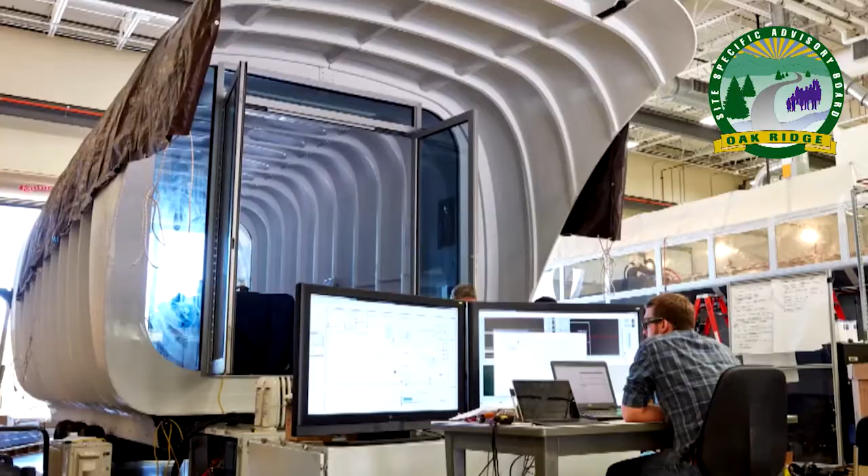The U.S. Department of Energy's Oak Ridge Reservation is the site of a vital national defense facility and a modern computational and scientific center. But over the years, parts of the reservation have been contaminated with radioactive and other hazardous waste. DOE has been busy cleaning up those affected areas, but much remains to be done.

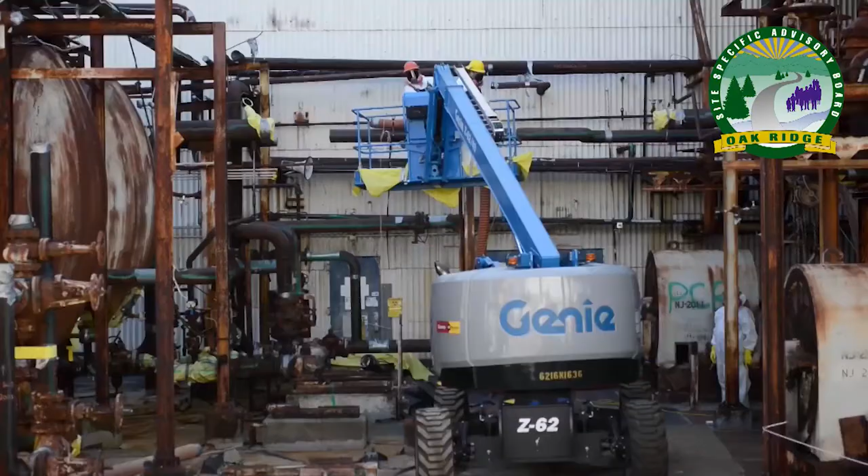Citizen input is a valuable part of that effort, and DOE welcomes advice from the Oak Ridge Site-Specific Advisory Board, a citizens panel that provides independent advice and recommendations on DOE's cleanup of the Oak Ridge Reservation. The board provides input on a wide range of environmental cleanup operations underway at Oak Ridge National Laboratory, Y-12 National Security Complex, and the East Tennessee Technology Park.

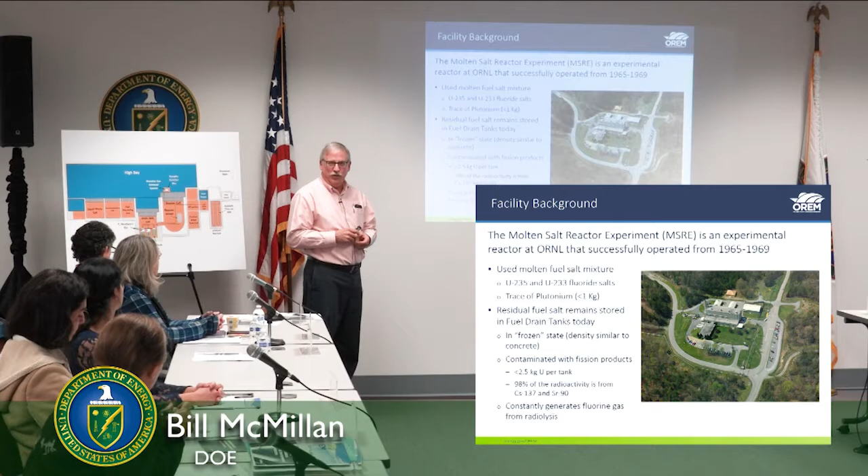Okay. So the Molten Salt Reactor Experiment was a facility built at ORNL, and it operated in the late 60s. Its purpose was to test different types of reactor fuels in a molten salt breeder reactor operation. And I'm not a reactor guy, so don't challenge me on what that really means, but that's what its purpose was.

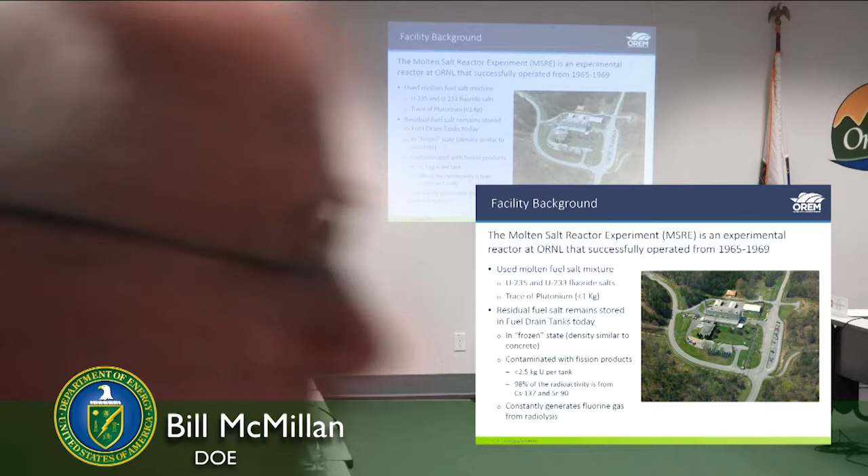And they tested uranium-235 and uranium-233 as the primary isotopes in those 4 years of operation. Towards the end of that, they actually also tested a little bit of plutonium in the facility to see how that would react in the reactor operation.

The fuel mixtures utilized a fluoride salt, primarily uranium tetrafluoride, in a carrier salt of lithium fluoride and beryllium fluoride, I believe, or barium fluoride. Some fluoride salts were the carrier that remained molten and circulated through the reactor system. That salt today remains at the facility.

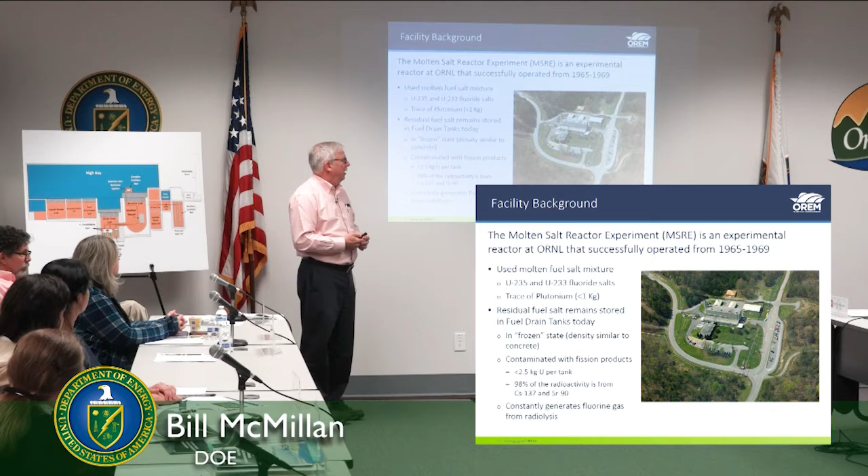Once the reactor operation ceased, the reactor core and the recirculation system within it were all drained into drain tanks. I've got some photos of that in a few minutes. And then after all the system was drained, it was actually flushed with a flush salt to wash any uranium residues from that system as best it could be done.

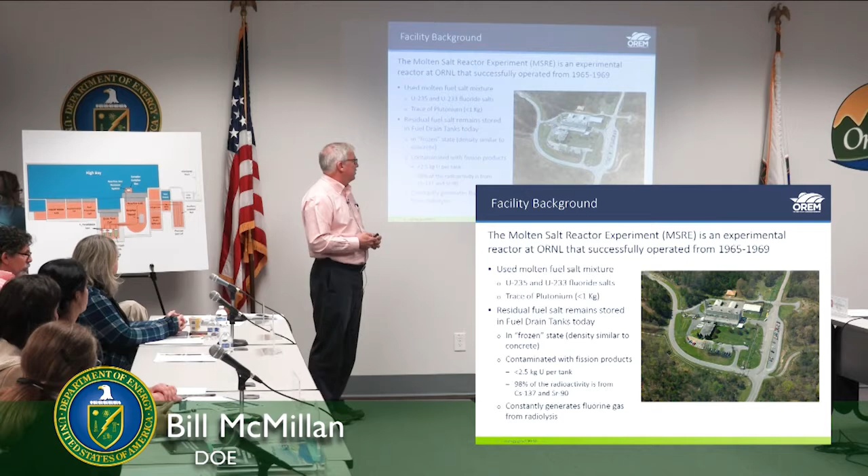Today, the salt in the tanks is in a frozen state. In other words, it cooled and solidified. It's in a frozen state, and its density is similar to that of concrete. It's a rock hard salt mixture, contaminated with fission products.

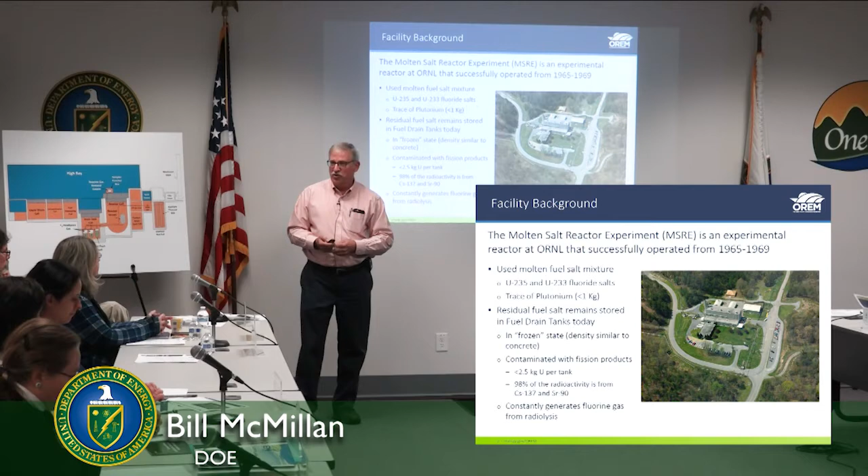Now in the late 2000s, the reactor salts were defueled, so the uranium has been removed. There's still that trace of plutonium in it, but about 2.5 kilograms of uranium per tank is worst case. They actually measured the tank that had the first material, which is believed to have the highest concentration of uranium in it.

After defueling, there's about 2.5 kilograms in that tank, and assuming the other tanks are less contaminated than that, which is pretty well certain based on the analysis. So less than 2.5 kilograms per tank, and there's 3 tanks.

The radioactivity is gamma radiation coming from the byproducts cesium and strontium-90. About 98% of the radioactivity is from those relatively short-lived radionuclides, strontium and cesium.

But the hazardous material constantly generates a little fluorine gas from the leftover fluoride salts due to the radiolysis of those salts. So that represents the biggest hazard we deal with today. It's not the radioactivity or the radionuclide content, it's those fluorine gases that come from the salts.

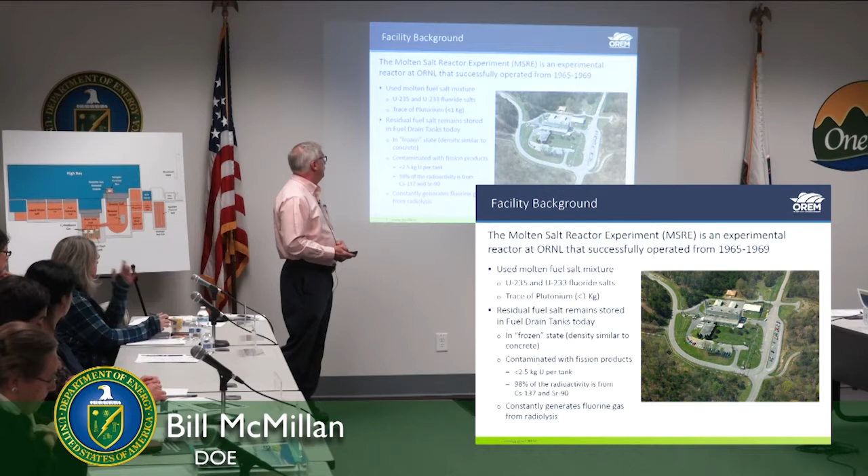Location: MSRE is located, if you're familiar with the lab, on Melton Valley Drive, which is kind of on the backside of, what's the ridge? Melton Ridge? Pine Ridge, behind ORNL proper. So it's on the back road.

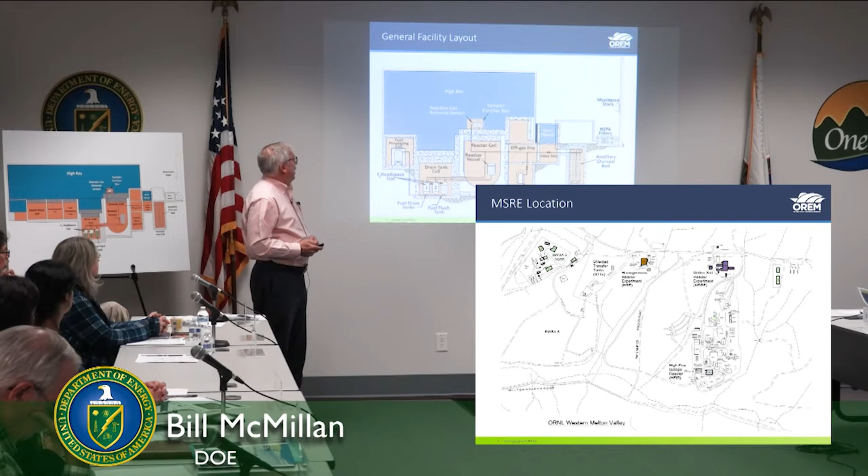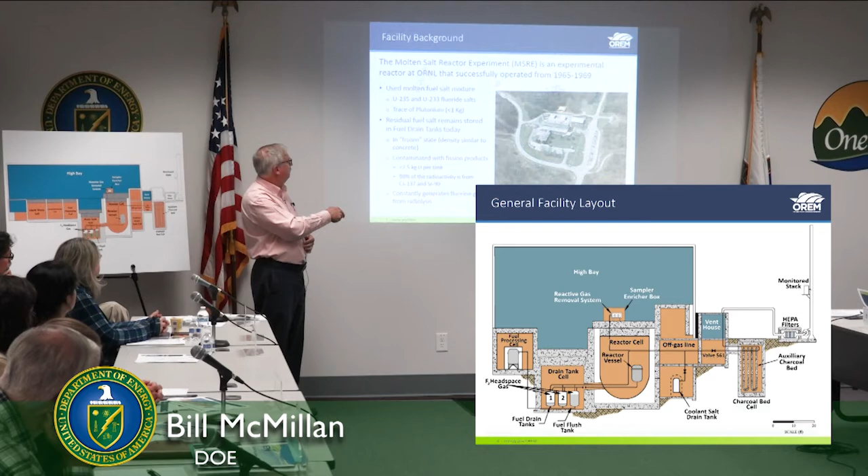This is the same as what we have over here. Basically, this is a profile of the facility, ground level being right in this area right here. So the reactor cell was in the center in an underground vault. It's got the shield plugs on top of it. The drain tank is adjacent to it at a little lower level, obviously to let the material drain into it.

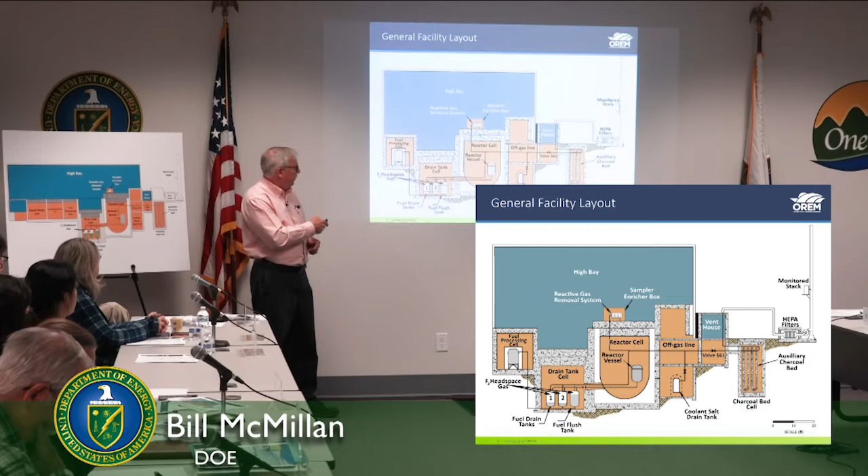And then you had various accessory facilities. Basically, the coolant recirculation system was on this side. Some of the off-gas filtering systems over here with the charcoal bed, and then HEPA filters, and the exhaust goes up the stack. Currently, you see this reactive gas removal system, which was actually added in the mid 2000s, and most of these other facilities are all drained and decommissioned as well. So I'll refer back to this. That's why I've got the chart on the right.

Some of the history and notable activities after the reactor was shut down. I mentioned all the salt was drained into the drain tanks, and the reactor loop was flushed with a flush salt, which was also drained into the flush tank. In 1994, though, well after the shutdown, it was realized that a lot of the uranium was starting to collect in the off-gas system, in the charcoal bed.

So we had significant concentrations of fluorine and UF6 gases that led to the contamination in the auxiliary charcoal bed, which is this system over here. I think I've got a picture of this too, but they're really standpipes that the air circulated through.

And so there was a cleanup action to clean up those charcoal beds to remove the contamination. That uranium was removed from the charcoal bed in the 1995 to 2000 timeframe, and that's when the reactive gas removal system was installed. You'll hear me talk a little bit about RGRS as we go through. That's the system that treats the gases to remove the fluorine and any residual uranium from the gases in the off-gas system.

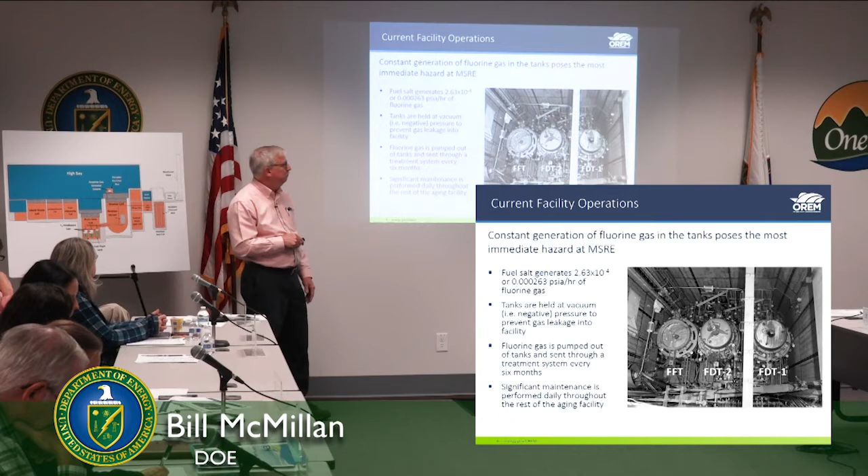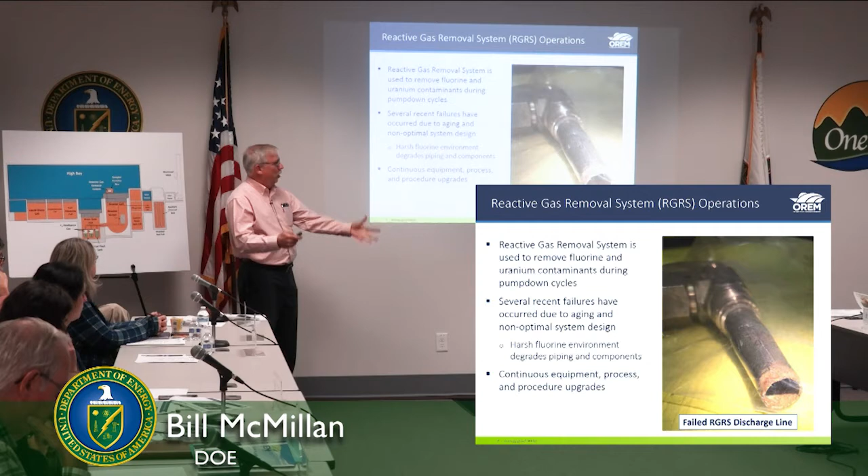So a couple of years ago, with all the issues with maintaining the MSRE, we started looking and thinking about what do we need to do to make the operation a little more efficient. So we had an engineering evaluation done, brought in a team of experts from outside of our organization that could take a good hard look at the systems and make some recommendations. So two key recommendations I'll talk about tonight, because we're actually implementing measures to take care of these two recommendations. One is to install a continuous ventilation system to replace the RGRS system. As I mentioned, the fluorine gas is kind of the big heavy hitter, and the generation rate is very, very low. So why are we letting it accumulate to a point where it's hazardous and difficult to handle, and doing an active operation to pump it down? So the team recommended going to a continuous ventilation system, and that's something I'll talk about here in a couple of slides.

That would eliminate the large concentrations of fluorine gas that you currently get, and eliminate a lot of risk from the corroded components of the system.

Looking at the electrical systems, we're doing some things to improve the aging electrical systems. A couple of years ago, we had flooding in the basement from groundwater seepage. The sump pumps down there failed, and when we went to shut the power off, we found leads coming into the building that we didn't know where they were coming from. That helped us realize the uncertainty we have with the power feeds into the facility.

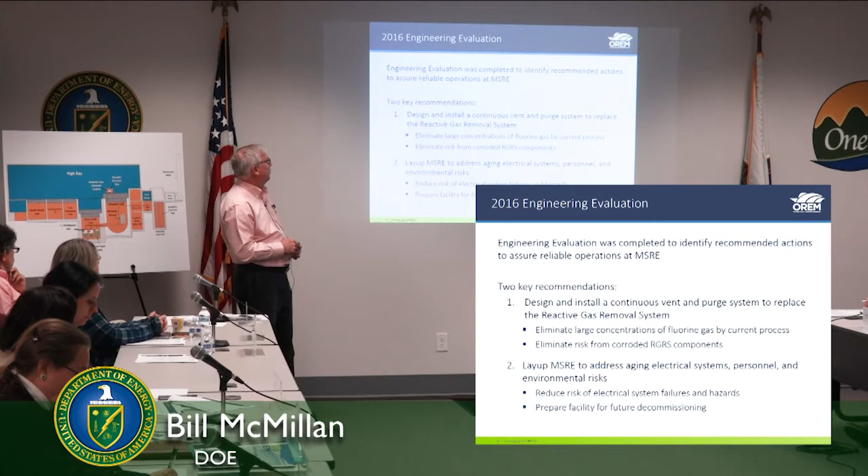That engineering evaluation was completed, and we've taken it to heart, looking for things we can do. So the 3 things I'll talk about based on the engineering evaluation: the continuous purge system, the layup, which is what we call the electrical upgrades, which also involves heating, ventilation, air conditioning, and some office refurbishment, and the in-situ decommissioning, an idea we came up with a couple of years ago. I think in one of the briefings Jay Mullis gave, he talked about that as an opportunity we're looking into, so I'm going to bring you up to speed on where we are with that process as well.

Talking about continuous purge, it's currently in the design phase, and we're getting close to starting the work in the field. Basically, it will replace the current RGRS system, streamline the removal of the gases, minimize any failure points, and reduce potential areas of exposure to workers through passive system maintenance.

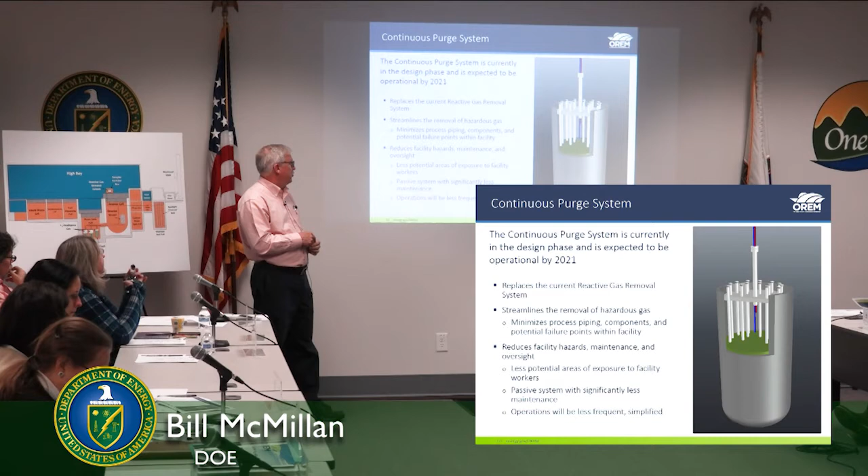So it's basically a passive system that will be continuously operational. We won't need to go into a big activity every 6 months to do an active pump down.

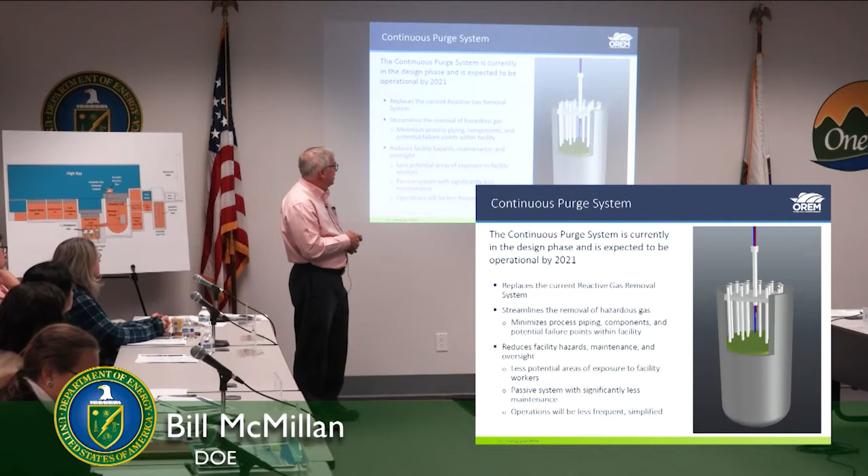If you take a look at the schematic here, this is basically a schematic of the fuel drain, one of the fuel drain tanks. The risers in the middle are where the old thermal probes used to be located when they tried to heat the system. But the important part is looking at the red and blue lines up there. Our intent, and I think the next slide will talk to it a little more, is to input into those tanks a constant flow of nitrogen.

I know this is a big eye chart, but what I was just showing you was one of these tanks. The blue line is the feed of nitrogen into the tank, and the red line coming out is the off-gassing, where the nitrogen forces all the fluorine and headspace gases out with it.

I know you can't see where that's running, but it runs up out of the tank through the nitrogen cylinders that would be used to input the nitrogen. The red line goes out through a monitoring system that would tell us remotely that the system is operational, and we would monitor it remotely to confirm. It also has sampling capabilities in case we want to do periodic sampling of that off-gas to confirm the low concentrations we expect. Then it goes through that and straight on out the stack.

Some of the advantages: it'll allow for continuously ventilating the gas. The concentrations of fluorine are many orders of magnitude less than any regulatory requirements, so we won't need chemical trap treatment of it. It's hands-off operation, and we'll replace the current discharge lines with lines compatible with the small concentrations of fluorine that would be present. We'll use stainless steel throughout the system.

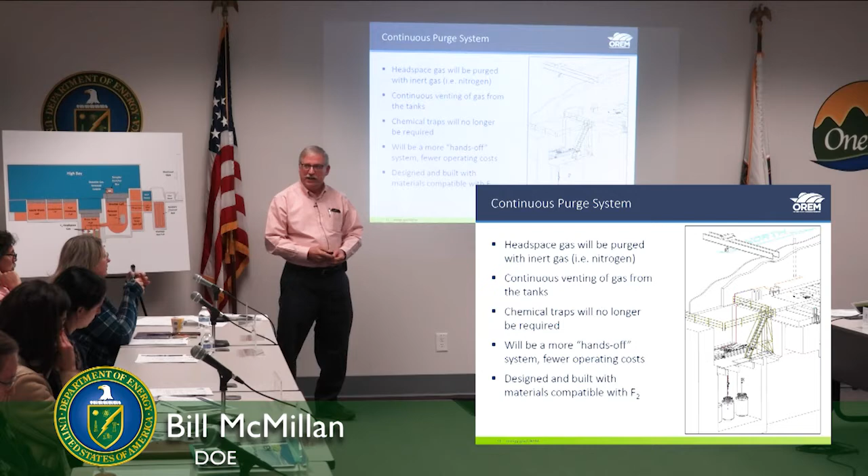So that's the continuous ventilation.

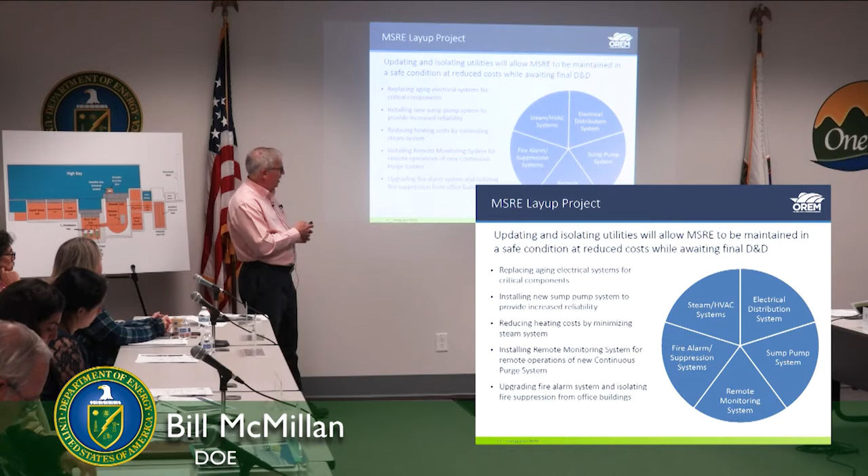Talking about the layup project, this is a brief description of some of the things we're addressing: the electrical distribution upgrade to replace the aging electrical systems, and new sump pumps in the basement. I mentioned the failures of those sump pumps a couple of years ago — they were really outdated pumps. We had them repaired and put back in, but we know there are better pumps these days, so we'll replace the sump pump system in the basement to provide the increased reliability we're looking for.

Minimizing the steam system. Currently, we buy steam from ORNL, and it's the same steam header that feeds the HFIR facility, which is a high mission priority for science. So in the wintertime when there might be a shortage of steam supplied for heat, guess who's the first one that doesn't get served steam? So we'll be upgrading the steam system to put its own boilers in place and provide the steam for heat, keeping the building heated so that the fire distribution system doesn't freeze, for example, and maintaining the people comfort that will be there in the offices.

New fire alarm system and suppression systems. All this stuff is outdated, and it's really just bringing it all up to standards of today. Remote monitoring system, I mentioned, we'll monitor all the equipment, the blowers, the ventilation system, the fire protection system, all that will be able to be remotely monitored without having people there to actually go inspect everything every day.

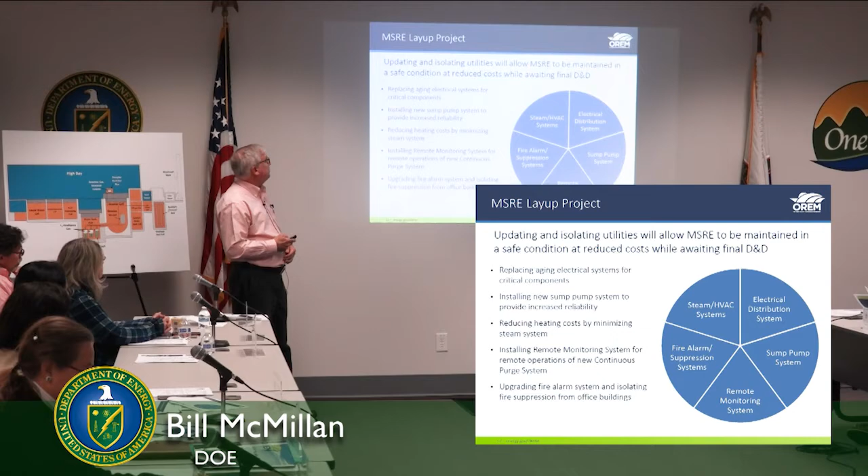Now switching to the ISD initiative, the in-situ decommissioning. Think of in-situ decommissioning, a lot of the synonym is entombment. We started looking at this a couple of years ago, but back when the CERCLA decision documents were developed in the late 1990s, we had basically two decision documents. This 1996 action memorandum was done to address the contamination, the migration of the uranium into the charcoal beds,

and it was what was put together to initiate the action to clean out those, to clean out the charcoal beds. 1998 was a record of decision for the D&D activity. At the time that was developed, even though entombment was a recognized decommissioning option by the NRC in the late 70s, we didn't really have much experience with it at that point in time. So the in situ decommissioning options, although mentioned in the ROD, were not really addressed and analyzed like they would be today.

So recognizing that, we decided we would at least see if that's worth analyzing today. And so a couple of years ago, we put together an initiative to, at least from a conceptual standpoint, do a feasibility as to whether it's something for us to go tackle and analyze in more detail. So we initiated a study.

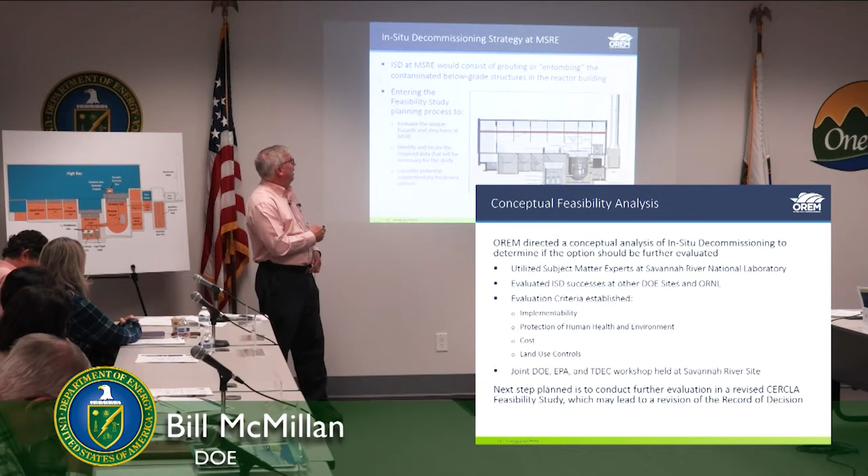So here's what it would look like if we were to do in situ decommissioning. It would consist of grouting and how much grouting it would be. Basically, the options would range from everything below grade, or it could be just the tank, just the reactors, tank and reactor, any combination of those below grade structures we would look at doing in situ decommissioning on.

Of course, the superstructure over it and all the support systems would still come down as planned. We wouldn't be doing like Savannah River's done with the reactors there, where the whole thing is just a big monolith sitting up out on the landscape. Primarily it would be below grade in situ decommissioning with a slab over the top of it when it would be done.

We're entering the planning process for that right now, where we're looking at what gaps we need to understand from a data standpoint, where do we need to go collect information about the facility, do we need to sample the salts in the tanks to get real-time data for that salt and content in it, how much NDA do we need to do, what kind of piping do we need to remove or not, and things like that.

So we're looking at where those data gaps are that we need to go fill, and the planning process will also conclude with establishing data quality objectives for any sampling results that we'll use, and actually I think it goes all the way through preparing a sampling analysis plan. That plan and doing the sampling, doing the actual work of the feasibility study is the next phase. This is phase 1 to get the planning done. Phase 2 would be where we actually go out and gather the data and start analyzing things and performing the models of the groundwater and things like that we would need to do.

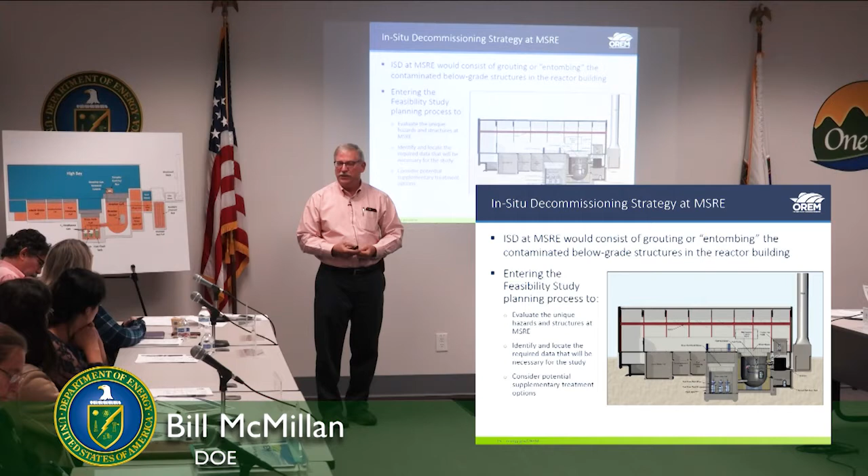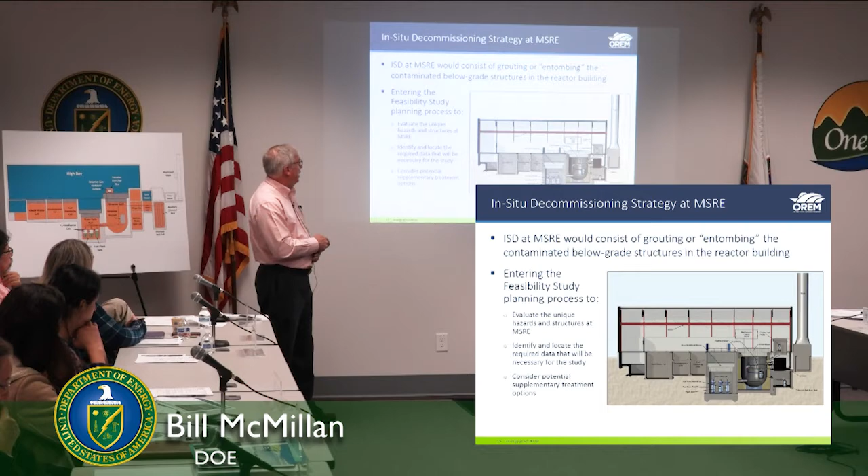I mentioned identify and locate the data. Consider any potential supplementary treatment options. Obviously, as long as there's the high dose fields from the strontium and cesium for the next 300 years or so, there's still a fluorine gas generation that's going on, although it should be going down as the radiolysis, as the decay of the strontium and cesium occurs over a couple of hundred years. Whether supplementary treatment options, getter materials, or passive treatment of those off gases is necessary to incorporate into the plan. So the planning process is looking at all that.

The update of the feasibility study would provide the thorough investigation to address those options, which options, how much of the facility would be grouted or not. We would do modeling to evaluate the long-term impacts, similar to what's done in a performance assessment if you were a disposal facility. Looking out, models run, I think, for 1,000 years to understand as the system sits there, what is the release capability of it. Use of a getter material to capture fluorine if necessary.

What types of grout materials would be used. Some of the things that Savannah River's developed are self-healing grouts, that if they crack, they basically heal themselves. 1,500-year lifespan grouts, water repellent grouts, those kinds of things would all be considered as what would be the best type of grout to use for this situation. And then what kind of monitoring systems and long-term stewardship actions would we need to incorporate into our plan.

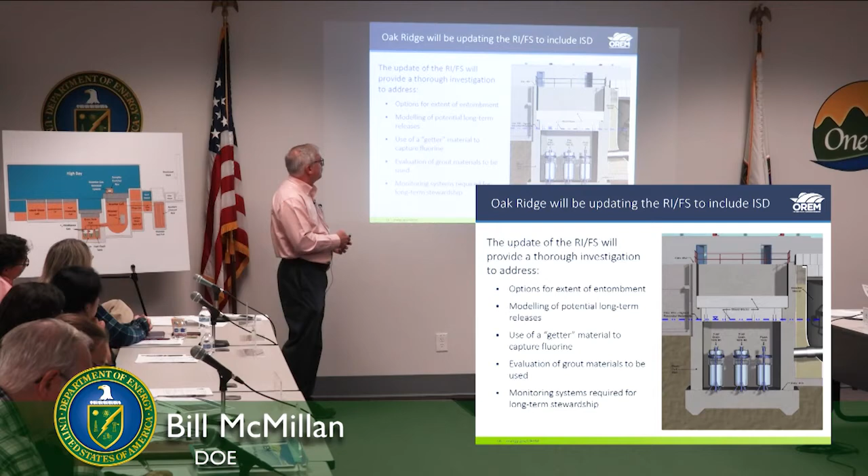Basically, using the drain tank cells as an example, I think the vision would be that you remove whatever extraneous piping that you would need to remove, but you basically would fill this whole interior area with grout and seal it all in place. So long-term maintenance and monitoring, site access controls. We already have site access controls planned for the reservation as a whole, especially in this area of the reservation. So what additional site access controls would need to be recognized for this?

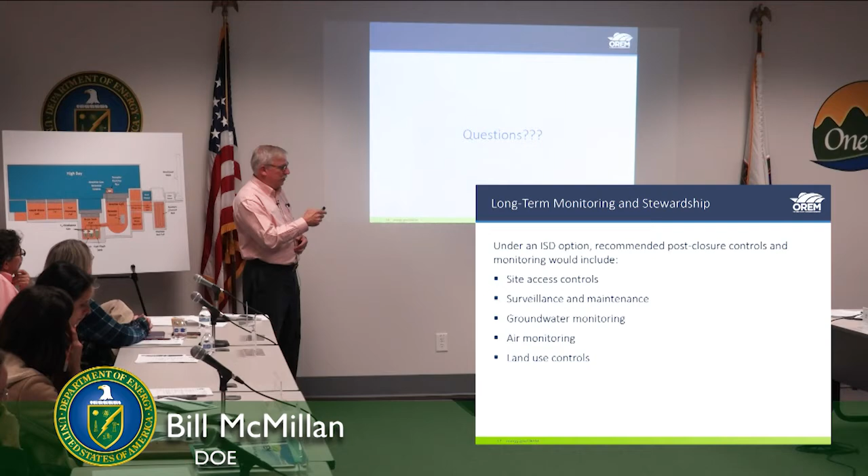Long-term surveillance and maintenance, groundwater monitoring around the immediate facility to make sure that if there were a release, it would be rapidly detected and we could go do something about it. Air monitoring of any emissions coming out of it, fluorine gas that's generated or whatever. And then land use controls, deed restrictions, constant presence, whatever that is. And that's probably incorporated into the existing land use control plan that we have. So anyway, that's it. A lot of stuff going on. It's kind of an exciting time, but those 3 major activities are underway.

And to do this feasibility study is going to take probably a good 3 years to get it all done by the time it's all said and done. So it's not something we'll see the results of tomorrow, but it is something that we think has a great benefit for the cleanup mission here in Oak Ridge if we can improve.

Because with the high dose fields today, it'd be a highly hazardous job to go out and do that. You saw the picture of the tanks down in the cell with all the interferences. Putting people down in there in a 1,000 R/hour field is very hazardous to do. So that's the benefit. Thank you, Bill.

Okay. I'd like to open the floor to board members for questions. Miss Harriet.

Bill, my question is, at this point in time, how many people are involved in watching out for MSRE? You know, there's a staff there in the building. There's probably 60 or 80 people currently in the building working on MSRE as their primary function. So it's a pretty heavy operation today. And that same 60 do the 6-month checks? You don't bring in more? Yeah. No, we don't bring in other people. Thank you. Mr. Fred?